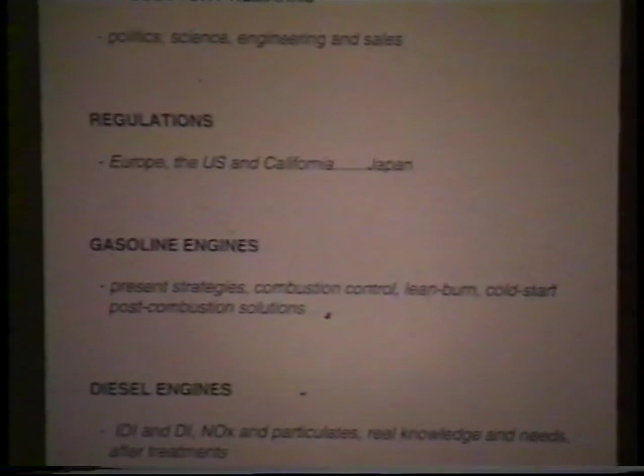So here's my title, Transportation and Exhaust Emissions. And I prepared a number of slides, and I've only used some of them. I think I have 24 slides in all. I want to make some introductory remarks about politics, about science, about engineering, and about sales. And there are 6 panels on this topic, so they're easy to understand. And then I will take 2 panels to say something about regulations.

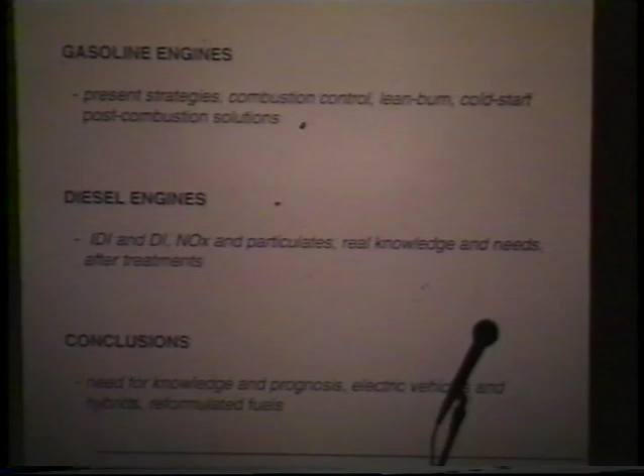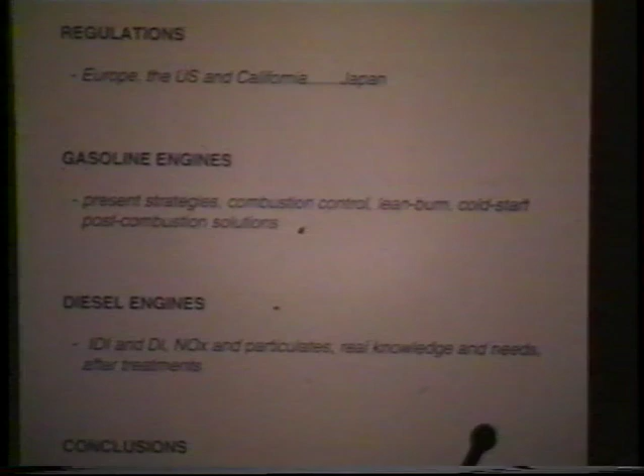And why do I choose regulations as the first topic after the introduction? I do so because the work which we conduct in universities, at least at the moment, is controlled by the requirements of people who make regulations for transportation. And I'm very grateful to them because they have set rules which are difficult to follow, and we have to spend money in order to try to understand and to improve the situation so as to meet their regulations. And I will mention only, I think, in this talk, some of the regulations in Europe and some in the United States, particularly in California.

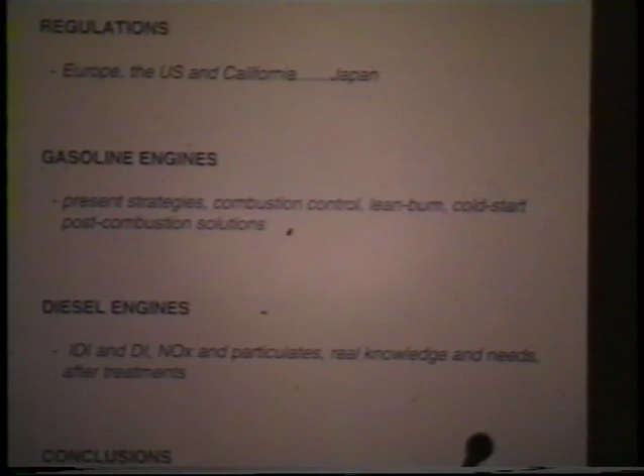And then I will go on to talk about gasoline engines and diesel engines, and you will note that I do not say anything about gas turbine engines for transportation, and the reason for this will become clear on the next slide. So when I come to the end, I will make some quick conclusions, but perhaps I can state the most important conclusion at the beginning, and it is that without better knowledge than we have today, we will not be able to meet the regulations which are proposed for the year 2000, so that more work is necessary, and it is more work of the type which involves understanding.

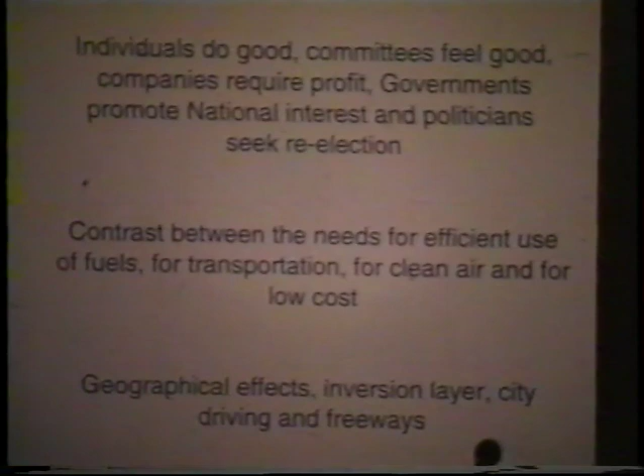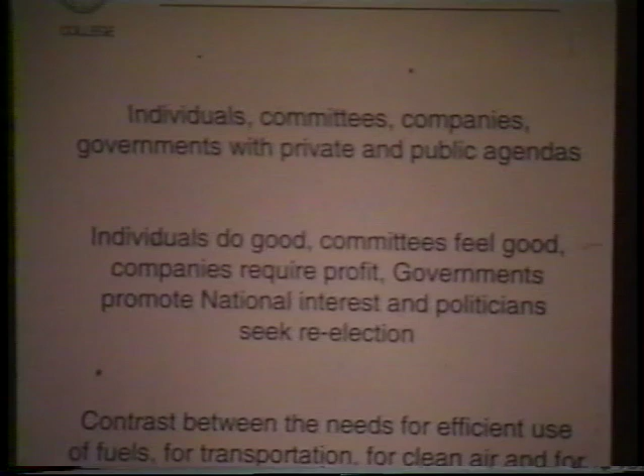The origins of regulations, the first of my introductory remarks. Regulations are formulated and imposed by individuals. These individuals come together in committees. The committees have representatives of companies, governments intervene, and private and public agendas are also there trying to make their statements. So that regulations are things which, to some degree, we can all influence, but it is difficult to influence them as an individual. The motivations of people who are on these committees are various. Most of them have goodwill, the good of the people at heart, but it's the people from the local region in many occasions.

Sometimes it's the people representing a state or a province, and sometimes it's people representing a national government, or in the case of Europe, the European Union. These people are in some ways responsible to politicians. The politicians, even though they are wonderful politicians, usually seek re-election. So each of these individuals, each of these committees, each of these companies, each of these governments and the politicians behind them have an axe to grind. And the grinding of the axes can often be heard for very, very long distances.

So we should be careful with regulations. They are not cast in concrete. They are likely to change.

If you consider the contrast between the needs for efficient use of fuel, for transportation, for clean air, and for low cost, and then think of the requirements of somebody who drives a truck and makes money from doing so, from somebody who sits on a beach and wishes it to be clean, for someone who sells gasoline or diesel fuel, or for someone who wishes to get from A to B in his Ferrari very quickly, these requirements are all different, and they are in some contrast. He who wishes to have clean air may drive his Ferrari, but he has to have a catalyzer in order to keep it relatively clean, and he probably would rather not have it.

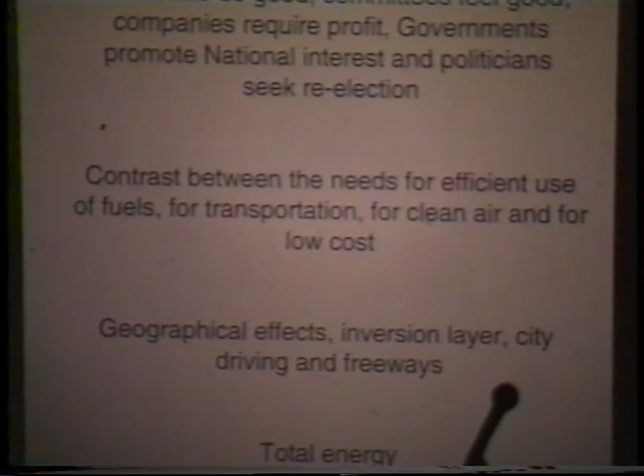It had to be designed, it had to be built. The manufacturing costs, at least in the first instance, are rather large. And so if you're going to talk about energy conservation, it should include manufacturing costs and the power levels, the generators which are required to provide the electricity which drives the electric vehicle. So it's a complex business.

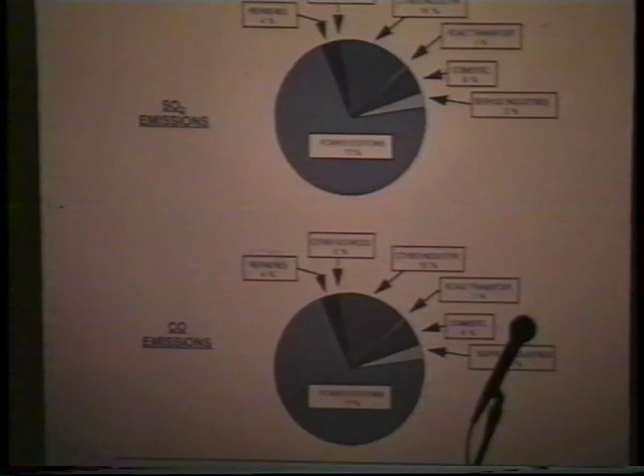And if you glance for a moment at each of these slides, you will see that road transport is responsible for a lot of the emissions of nitrogen oxides. It is also clear that power stations are responsible for just as much. There is nothing on this slide to represent airplane gas turbines, which is why I didn't want to talk very much about it in the context of the title of this talk.

The airplane gas turbines generate NOx. They also generate CO and CO2 and some unburned hydrocarbon, but as a total global quantity, it's small compared to what happens because of power stations and road transport.

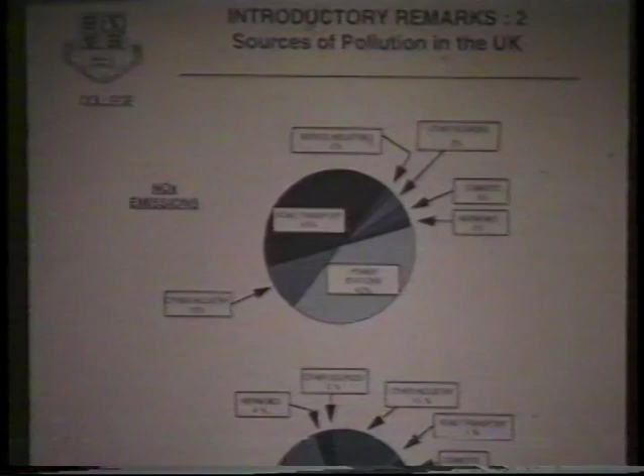If I look at sulfur dioxide emissions, about which I will say very little, there is an enormous problem, and it still exists in connection with power stations. There's a rapid trend to move away from sulfur-burning coal, sulfur-burning solid fuels, and an even more rapid trend to move away from solid fuels to gaseous fuels.

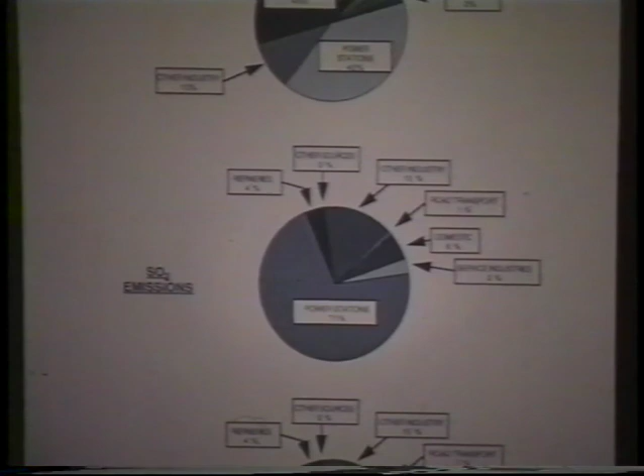But that will change again in the future, perhaps not in the next 10 years, but thereafter it will. And we'll be back worrying about how to clean out sulfur dioxide, which is a very nasty substance indeed, since with a little water it forms an acid, and the acid has harmful effects on just about everything.

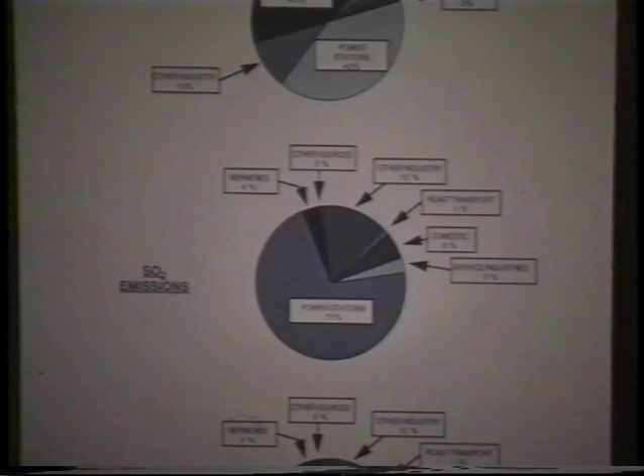Here I have carbon monoxide emissions, and carbon monoxide emissions are particularly important. They are toxic, they're plentiful. From power stations the quantity is very large, but from road transport the quantity is remarkably small. So in terms of road transport, we should worry about NOx emissions, and on this slide at least not very much about carbon monoxide. And if we're sufficiently efficient, then we won't have unburned hydrocarbons.

Perhaps I could say that these emissions in power stations may change in the United Kingdom when we start to burn cows. But perhaps it would be better if we burnt the politicians, but the pollutants then might be even worse.

A few words about politics, and I can take them in any order.

The top quotation comes from the Los Angeles Times, and it indicates the pressures which large companies can bring to bear on regulations imposed by other people.

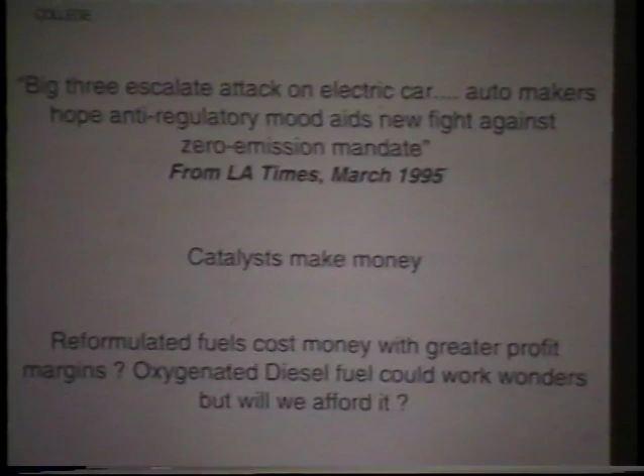The second one says that when you buy a car today, you buy a car with a catalyst, and you're happy to have the catalyst except when you stop the car because it smells, but you're not happy to pay for it. On the other hand, the manufacturer is quite happy. The man who provides the platinum from Johnson Matthey is extremely happy, and people like Daimler-Benz or BMW or Fiat are quite happy to make catalysts and make a profit from them, in the knowledge that you have to buy them in order to meet the pollution regulations.

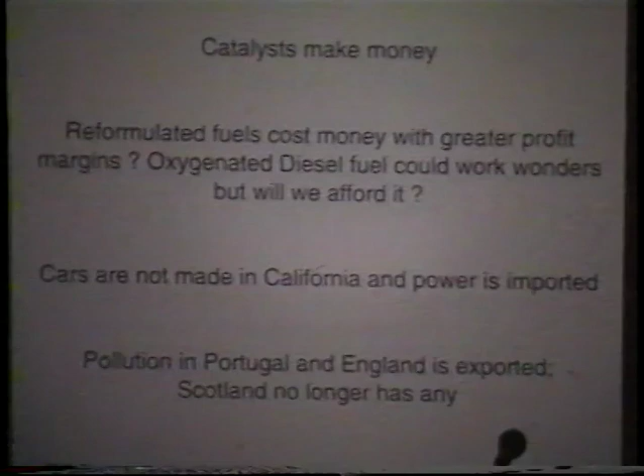Reformulated fuels, oxygenated diesel fuels, will we afford that? Well, reformulated gasoline improves the emissions, it reduces the amount of unburned hydrocarbon, it reduces the NOx, and now you buy it whether you like it or not, when you go to a gasoline pump in the United States, and you don't even notice the increase in cost, even though it was about 7 or 8 cents a gallon.

If it's more expensive to use oxygenated diesel fuels, but they too would improve things if we were prepared to pay for them. So there is a question here as to whether we will, in the future, spend more money by putting in better fuels into our cars or trucks.

Here's another line: cars are not made in California, nor is the power to make them. They don't make cars in California. The power supply for an electric vehicle doesn't come from California either. Much of it comes from Idaho and other places and is transported into the state. And yet the state of California has been responsible for much of the emission regulation which we're trying to meet today.

It's a very local problem, a local group of people effectively imposing regulations on the rest of us for reasons which suit them. If I think about pollution, there is almost no pollution in Portugal or in England because it's exported. It's something we export for free. There's a southwest wind and it transports it to other places. There is no longer any pollution in Scotland because there is no industry. The Industrial Revolution has disappeared and we don't have heavy industry there anymore, so we don't have much in the way of pollution. So some people care more about pollution than others.

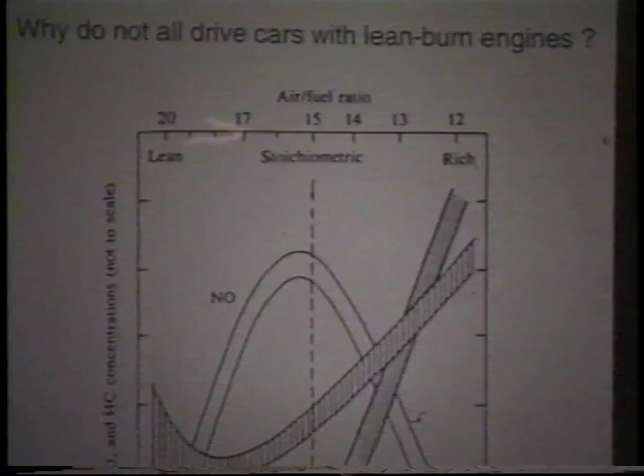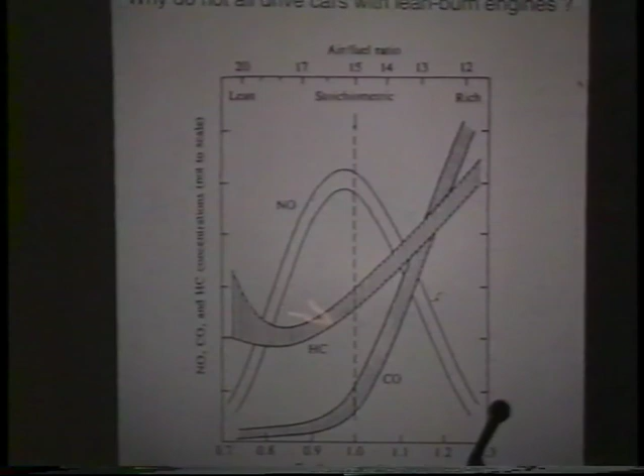This is a slide which relates to gasoline engines, and it's a technical slide, but it's easy to understand. If you burn your fuel and air in the engine with a mixture which has this ratio, 15:1 air to fuel, then you get a lot of NO, a lot of NOx, and you get a lesser quantity of unburnt hydrocarbon and some CO.

But if you were to burn in your car with an air-fuel ratio of 20, then the NOx level goes down, the unburnt hydrocarbon has gone down very slightly, and the CO level has gone down quite a bit.

So then you ask the question, why do we not drive cars with lean burn engines? There are two answers. One is that you can't drive with lean burn configuration all of the time because you want to drive quickly, so you need more fuel, and then quite often you're driving in this other range. That's one reason, although for more than half the time you could well be driving in this region here with low NOx.

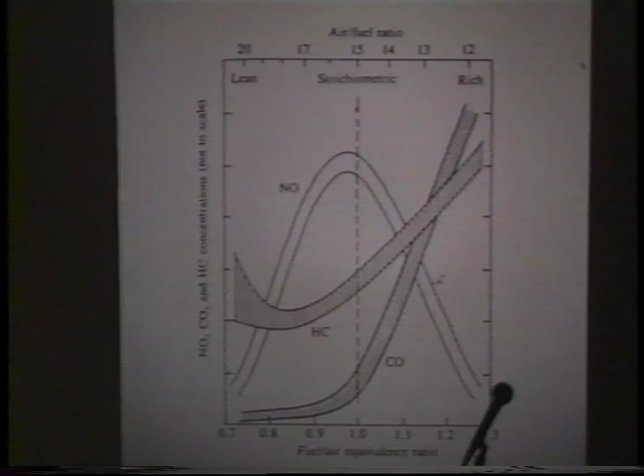So one reason why people do not drive with lean burn engines is that it's only for part of the cycle that you can use the lean burn. The bigger reason is that there has been an emphasis over many years in Europe and in the United States to drive everything with a catalyst. So you operate with this air-fuel ratio and the catalyst will work, burning out the extra unburnt hydrocarbon and converting the NOx into nitrogen and water. So the catalyst, in a sense, has begun to drive the industry as opposed to knowledge and best things for the individual.

How do we reduce emissions? There are two basic ways. One is to operate the engine with combustion controlled so that emissions will be at their smallest, which might suggest burning lean mixtures. In diesel engines, in the last 2 to 3 years, there has been almost a revolution with the advent of very high pressure sprays, computer controlled, squirting into each cylinder one at a time, and that's making a big difference to diesel engines today.

But it still involves a control of what happens inside the cylinder. The real question is, to what extent can we modify the combustion process to reduce emissions to meet the aspirations of the regulators? And that's why many of us are in the business of combustion today.

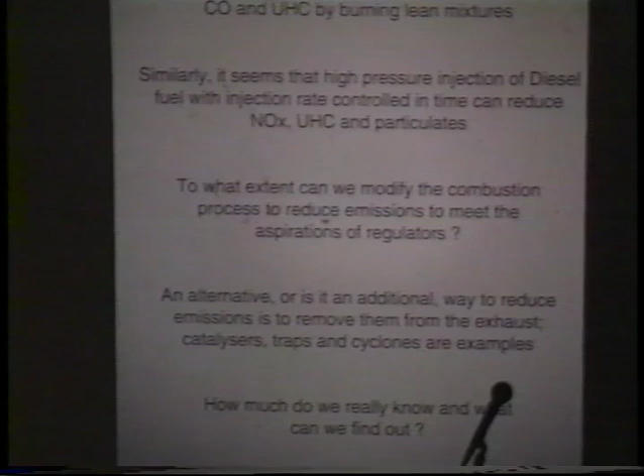The alternative is to allow the engine to behave any way it likes, or perhaps in a particular controlled way, and to have something at the back end. So in the gasoline car, you have the catalyst. In the diesel car, you also have a sort of catalyst, but you may have to have a bucket to pick up the particulates so they are not deposited into the street or into your lungs. Catalysts are something you do after the event, and capturing particulates is also after the event. There is no doubt in my mind that we would do better to concentrate on the combustion process itself, even though the catalyst and the separation of particles may be necessary in the immediate future.

The question at the end is one I'm going to try to answer: how much do we really know, and what can we do to find out?

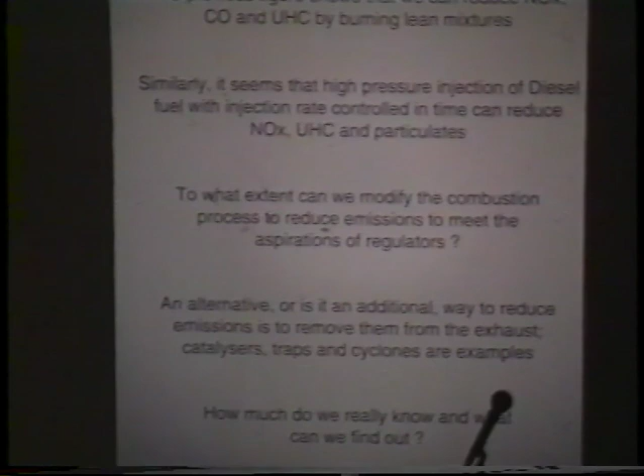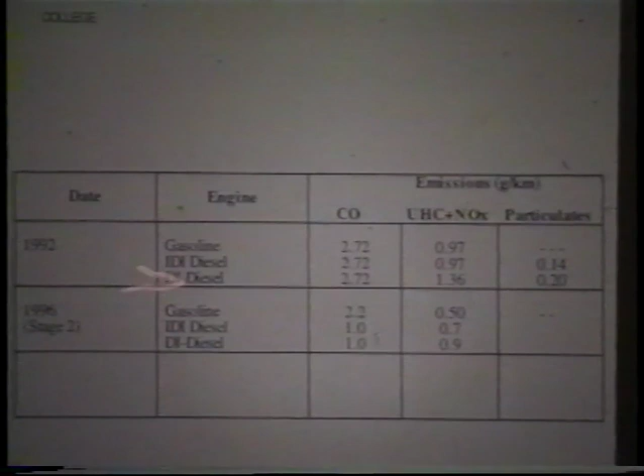A few words, and only a few words, about regulations. If you go back to 1992, the European Union imposed regulations on carbon monoxide, on the combination of unburnt hydrocarbon and nitric oxide, and for diesel engines, on particulates. The EEC also said they would give the direct injection diesel engine a break because more development work was necessary, but also because there's a high probability that the DI diesel engine will prove to be better than the IDI system, and that's why we all work on it today.

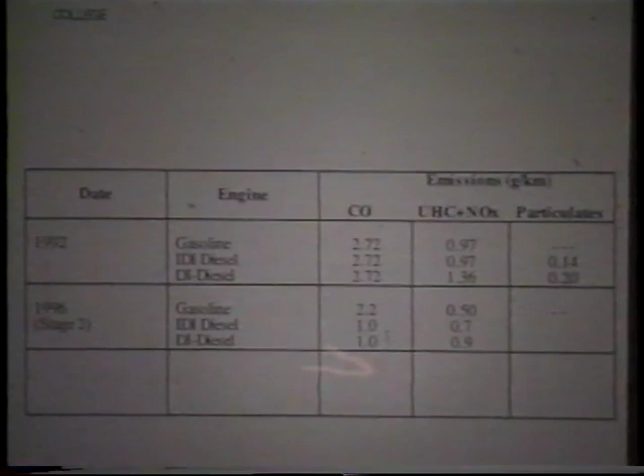So the regulations are posed in this way, and you can see that the quantity of carbon monoxide allowed in 1992 was reduced in 1996, and if I put in the stage 3 regulations for year 2000, these quantities would come down even further.

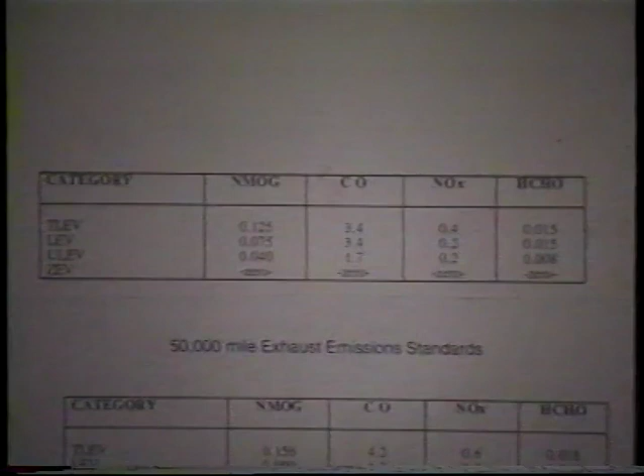The emissions regulations are still formulated in the same way, but this may well change. If I look at the way Californian standards are imposed, they're different. They don't combine unburnt hydrocarbon with nitrous oxide. They separate the different aspects of the hydrocarbons in these two tables, with CO separately and NOx separately.

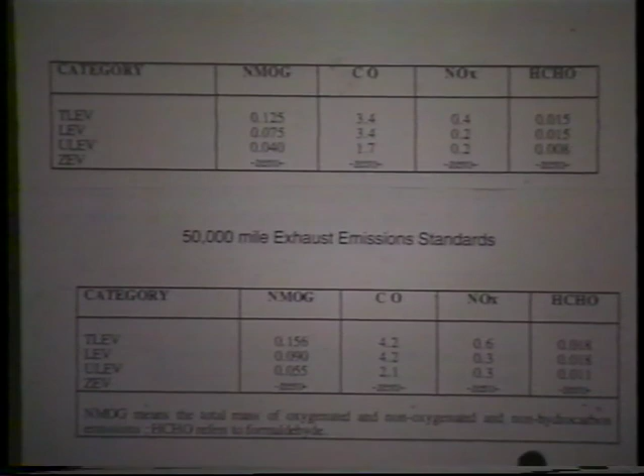But they have one bigger difference: they categorize vehicles according to a particular code, indicated in these little letters. They say we have today transitional low-emission vehicles, we have today low-emission vehicles, tomorrow we will have ultra-low emission vehicles, and ultimately zero-emission vehicles. The regulations about to be imposed will say that in 2003, 10% of all vehicles on the road have to have zero emissions. Today they say in 2 years' time, in 1998, 2% of vehicles on the road have to have zero emissions.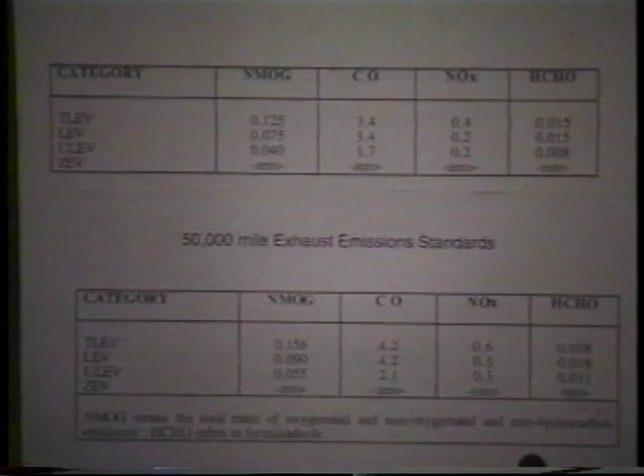In a way this is a strange decision, because there's no such thing as a zero-emission vehicle. There's always an emission. It may have come from the power plant which provided the electricity to drive the car, but the emission is still there. So we should be careful with these regulations. And that's all I'm going to say about the regulations.

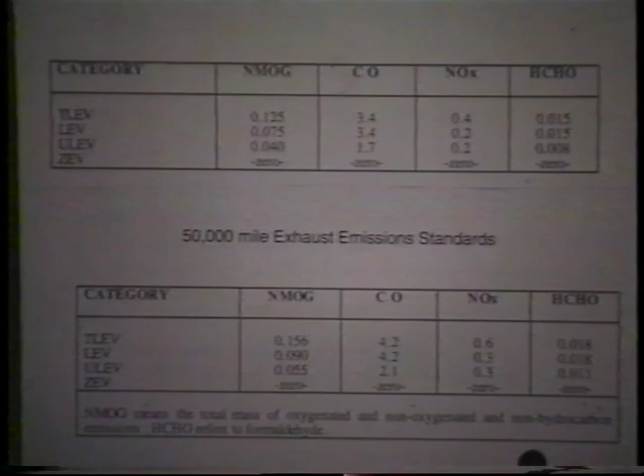I want to switch and say something about gasoline engines, and then something about diesel engines. And here's something about gasoline engines: I start and end with the catalyst. But I believe the catalyst is like a tail wagging a dog. That's how it appears to me in the way we work with engines just now.

The present three-way catalysts will only operate if the air-fuel ratio in the engine is within a certain range. You have to have some excess unburned hydrocarbon coming into the catalyst to light it. If you do that, you'll get 80% conversion of NOx, HC, and CO into effectively water, nitrogen, and CO2.

That number, 80% efficiency over that range, means you're talking about a new catalyst, one that hasn't been used and is about to work. It will work like that for a period of time which is not well quantified. We don't know very much about the longevity of catalysts; we just know that they get worse. That's one reason why countries have some control to try and regulate the car. They're tested after 1 year, 2 years, 3 years, depending on where you are. But the tests are not very sophisticated, so in all probability catalysts decay more rapidly than we think, and together with the catalyst, the emission performance decays too.

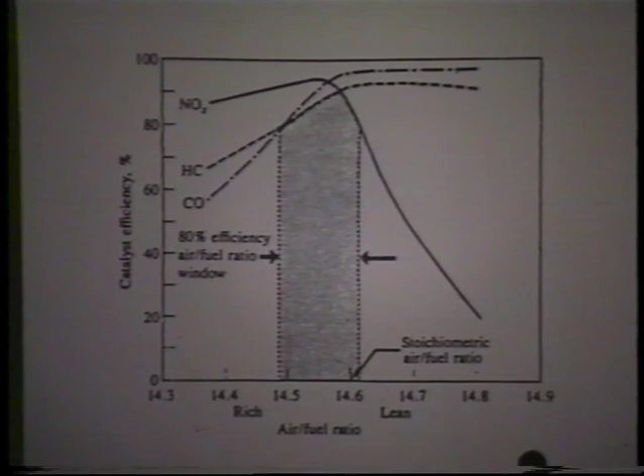If you look at the split between Japan and Europe/United States: in Japan, they make engines which operate with lean burn. In Europe and the United States, we make engines which operate with stoichiometric air-fuel ratios and with some exhaust gas recirculation. Exhaust gas recirculation will never be as effective as lean burn, but it's a convenient way to operate to guarantee you get the emission regulations satisfied, provided you have the stoichiometric ratio and a catalyst which is working properly.

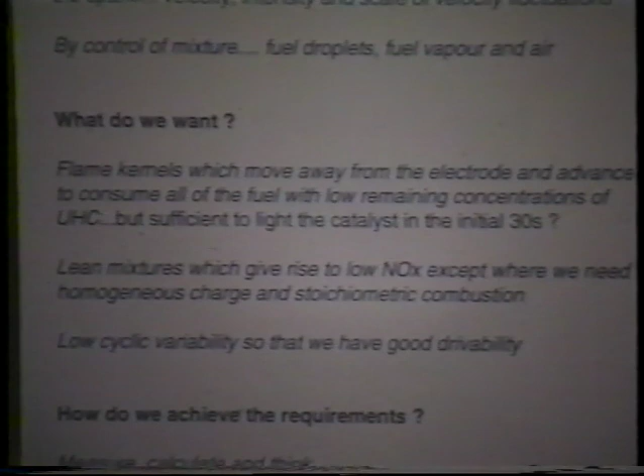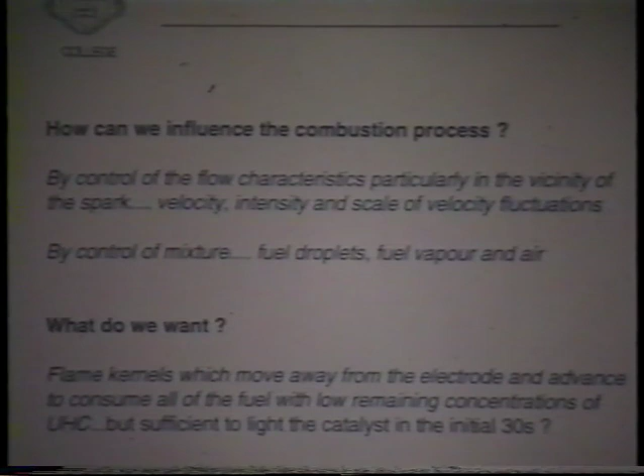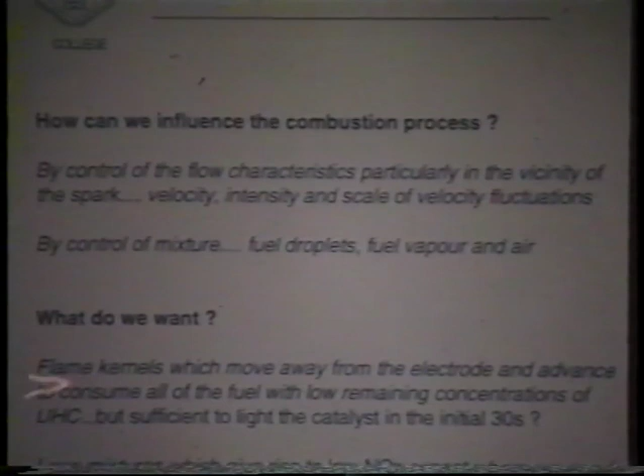How can we control the combustion, which is what we'd like to do? We have two main ways of doing it. One is to control the flow characteristics in the combustion chamber, and the other is to control the fuel, the way the fuel is added to the combustion chamber. That's true for both gasoline engines and diesel engines. What do we want? We want an engine which, when you climb into it, you put your foot on the accelerator and it takes off.

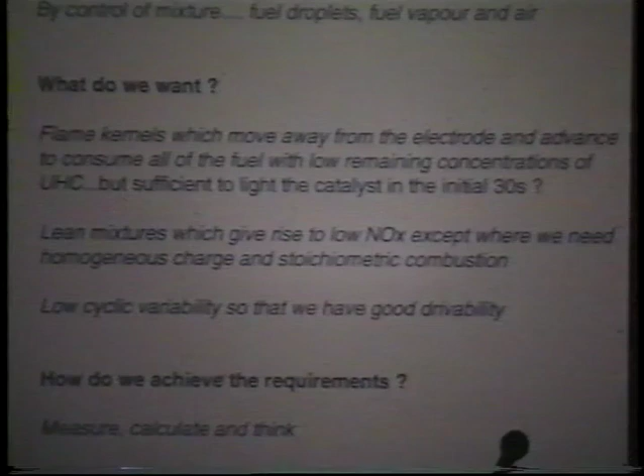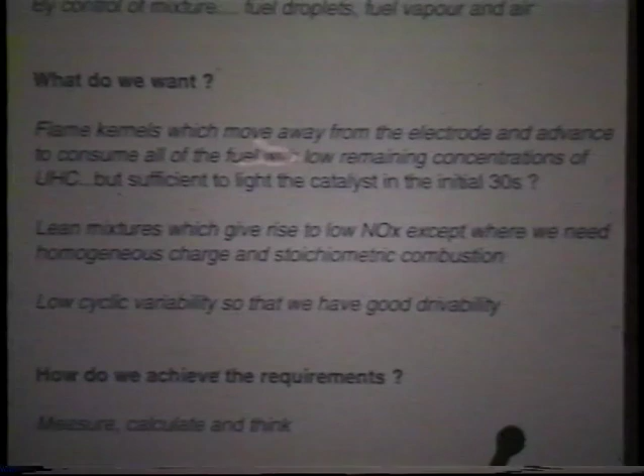It doesn't make vibrations. It runs reasonably economically, and it will accelerate past the person that you don't like in the car in front of you. I can translate this into flame kernels. This is a little flame which is formed when the spark takes place, which will move away from the electrode, that's the spark plug, and advance to consume all of the fuel with low remaining concentrations of unburnt hydrocarbon, and yet leave enough unburnt hydrocarbon to light the catalyst, which is down the pipe and underneath your feet.

Lean mixtures, which give rise to very low NOx, or can give rise to very low NOx, may have some problems in other respects because they may produce higher concentrations of unburnt hydrocarbon, but that too can be overcome. We want to make sure that we have low cyclic variability, and that translates into drivability. When you put your foot on the accelerator, the car should accelerate smoothly. And at the bottom line, I haven't put it here, we should always want to have a car which is efficient with good fuel consumption.

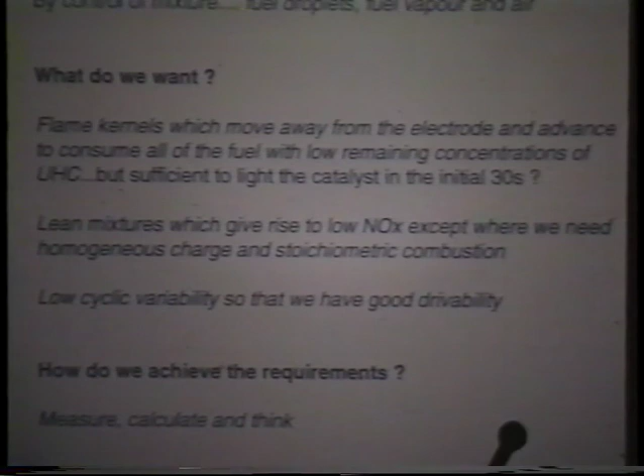And how do we get these things? Well, we measure, we calculate, and we think. And if I can then plug in 3 or 4 slides what it is that we do when we measure, we build special purpose engines like this thing here, where you can get optical access and you can see what happens inside the combustion chamber. And then you develop techniques like the ones written here, laser Doppler velocimetry, phase Doppler velocimetry, fluorescence, and so on.

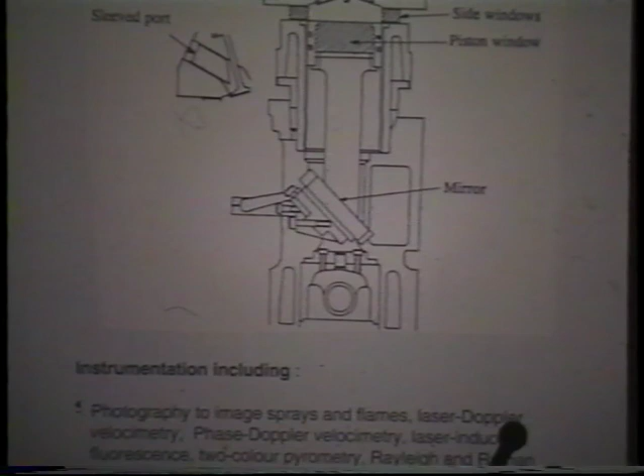Very complicated techniques which many of my colleagues in the audience today have participated in and indeed been leaders in the development of, so that today we can make measurements inside these engines where yesterday we could not. These instrumentation developments are essential to what we do today. If they had not been made in the past few years, we would not do very well at developing what happens inside the combustion chamber of an engine. I can say the same thing for calculation methods, that you have to have a lot of background work in order to develop a calculation method which will allow you to usefully predict what you might get inside an engine.

This is a messy slide, but there are only a couple of things that I want to say, and they're easy for me to say. This is a slide which says that if you change the velocity characteristics within an engine, then you can change some things which matter. And let me just pick 2. Well, 3 maybe. These are flame kernel growths inside an engine when you change from a flow which is almost not there, pretty well quiescent, to a flow which is there. And this lot of flame kernels are a little bit bigger than those which you see here.

But this slide here shows that for any given equivalence ratio on this axis here, the mean effective pressure is very much increased. That's this curve here, when I have flow inside the combustion chamber. So in this slide, I've arranged a flow inside the engine, and I get a much better mean effective pressure. You're looking at numbers, I can barely read them, but about 30% better in this particular case at an equivalence ratio of something like 0.9.

At the same time, this slide shows drivability, the coefficient of variation of the pressure fluctuations, and the corresponding curve to that one there is the bottom one there, which says that the car is much easier to drive. So by producing a flow inside the engine, you make it more powerful and you make it more drivable for the same amount of fuel. How do you arrange that? Well, you do it by changing the port and the valve and the shape of the combustion chamber. And about this, we know a lot.

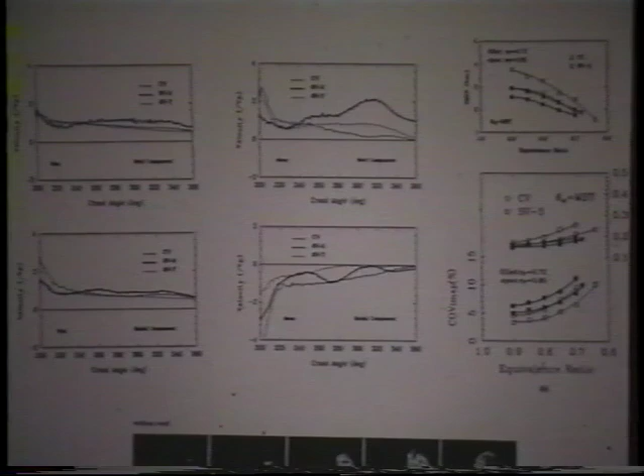The second thing which you can do is on this slide, and I will take it in 2 stages. This is a slide which shows the variation of peak combustion pressure in an engine as a function of the equivalence ratio or the inverse of the air-fuel ratio. So if I'm stoichiometric, that's where most cars run, I'm up here. If I'm lean burn, I'm down here.

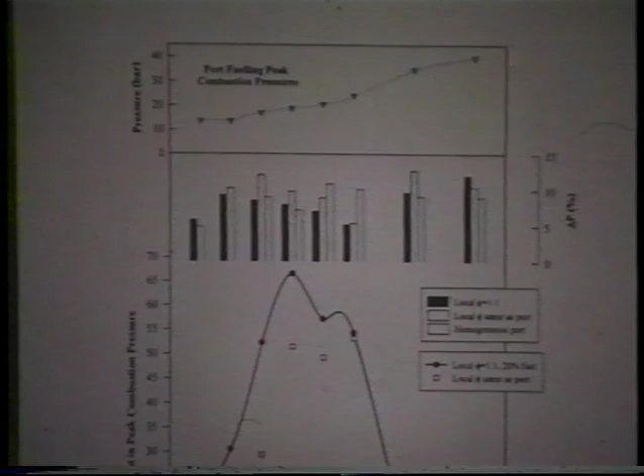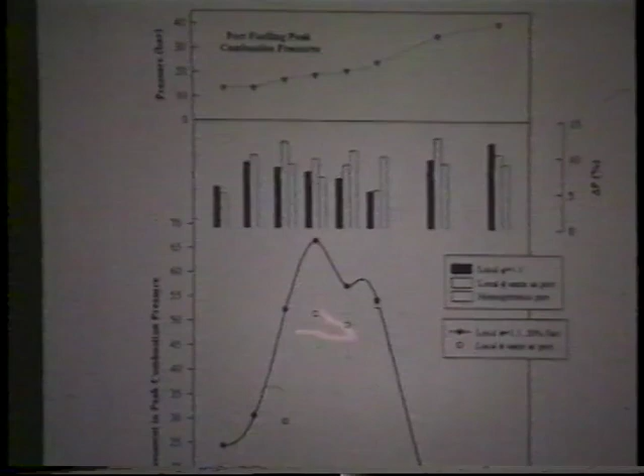And if I introduce into this flow a small jet, a turbulent jet, which is aimed at the spark plug, a very small one with a very little amount of air, then I can get a benefit. I can change the peak combustion pressure, for instance, here at the equivalence ratio of 0.7. I can improve it by 55%, just by that small jet aimed at the spark plug at the right time.

Now I put that slide in partly because I wanted to say a few words about something called direct injection, because you have different ways in which you can put the fuel into this engine. What I've drawn here is one where about 80% of the fuel goes in with air through the port, and the rest goes in through this little jet. But you can turn that around, and you can put all of the fuel and all of the air in as a jet, and you get a direct injection gasoline engine.

There is nothing new about gasoline engines which have direct injection. Mercedes had them in 1952, I think, although I was too young to notice. More recently, they have them in one engine coming from Japan, the Mitsubishi engine, where they have direct fuel injection in that car, and they tell us that the performance is wonderful, but we don't know yet.

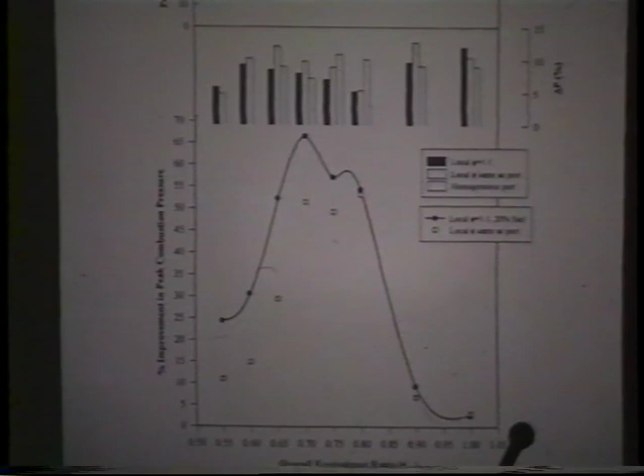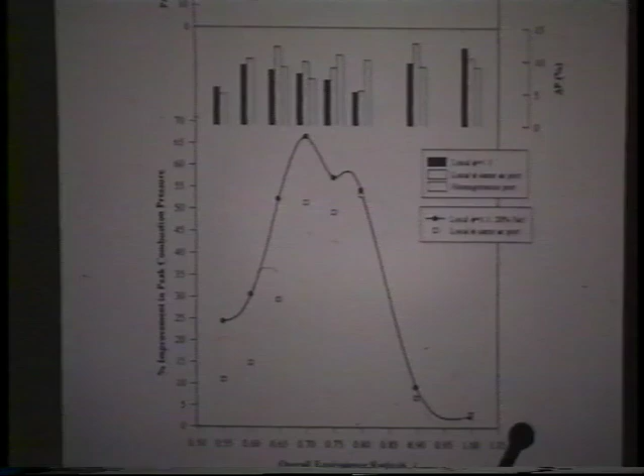So there is a range of ways of injecting fuel and air into the engine, and I've tried to dwell on three. One where you have the fuel coming only through the port. One where you have some of the fuel coming through a small jet, and a third one, which I have not shown, where the fuel comes entirely through a small jet and aimed usually at the piston in order to atomize further before it is burned. It is not clear which of these is going to be best. That's something that remains to be proven. But they do give you a degree of flexibility in improving the emission performance of vehicles of today.

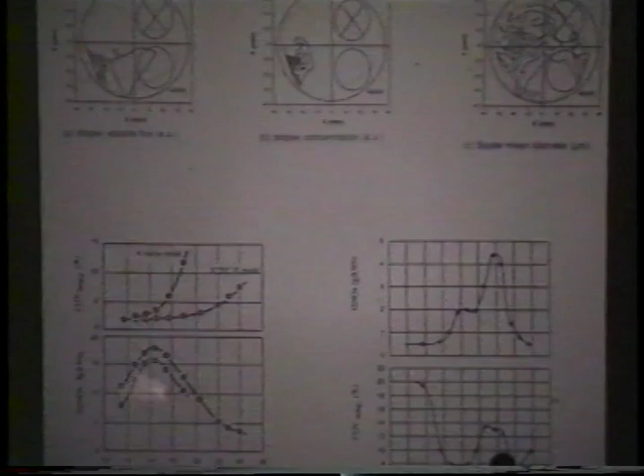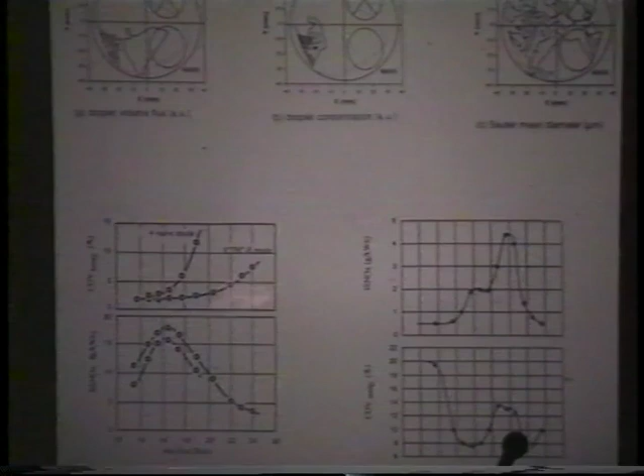And because that changes the flow pattern inside the engine, which is port fueled, the drivability in the engine is much better. If you climb into a car with a COV bigger than about 7%, you will complain. If it's less than 7%, you'll be very happy. This engine will run to only an air-fuel ratio of something like 18 before the drivability is very bad. But this engine here, which is the same engine with a different valve movement, will go to an air-fuel ratio of 24. Now, every car that I know in Europe today and in America operates like this and not like this. There must be a lesson there for us. And if I look at this diagram here, the NOx concentrations out here, with the lean burn situation, have gone down to a small fraction of what they were there. So perhaps we have something to learn from our Japanese friends.

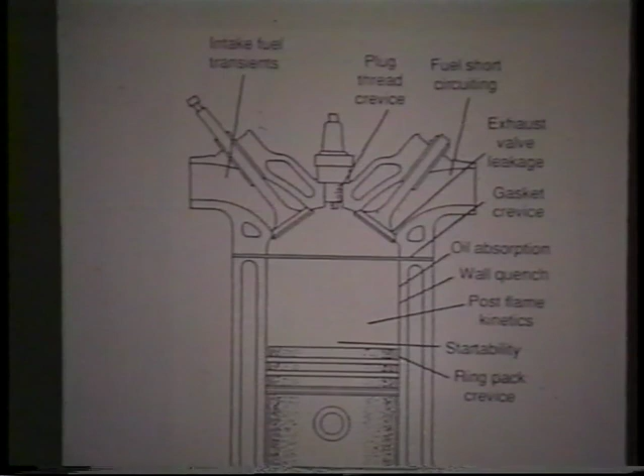Let me stop the talk about gasoline engines with 2 quick slides. One of them is to say that we know a lot about gasoline engines. We want to get rid of the unburnt hydrocarbons, except for the small amount which we need in the catalyst, and we know where they come from, and we know how to get rid of them. It isn't easy, but we know how to do it. And then the last one comes back to my catalyst again.

One approach to the problem of catalysts is to say, I will develop a catalyst which will operate with lean mixtures, so that then I can sell my catalyst as well as have my lean burn engine. The levels of NOx which you get from a truly lean burn engine are only slightly higher than those from present day regulations. But that small difference has imposed a very big effort on the industry in order to make new catalysts which will operate with these lean mixtures, in order again to convert the carbon monoxide, the hydrocarbon, and the NOx into CO2, H2O, and nitrogen. And this may be a disproportionate effort, but it's an effort which is going on and which will, in the end, improve emission situations.

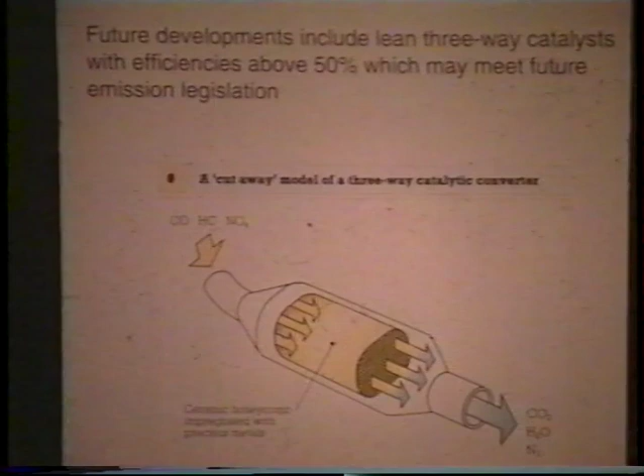Now I have a few slides on diesel engines which say some of the same things. Diesel engines are awful. Diesel engines are smelly, heavy, not responsive, things which we see very often. And I say that because you don't want to drive them most of the time, some of you do, but when you want to drive them, you want them to have performance the same as that of gasoline engines, and

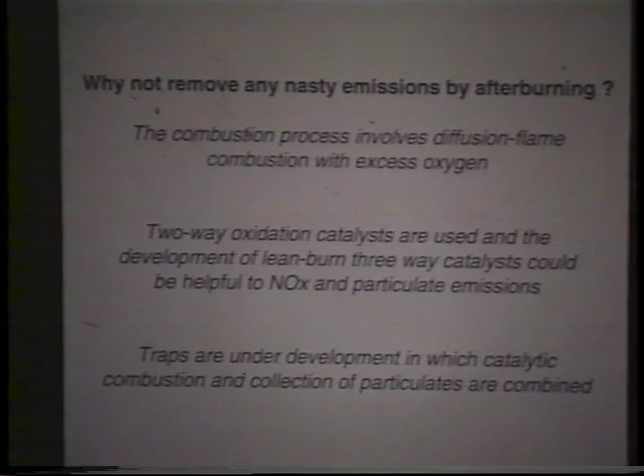it's hard to do. I also say it because it seems today that every time I drive behind a truck, something must be wrong, because when he changes gear, usually automatically, I get a slug of soot, or particles, coming into my intake system in the car, and I can smell it from some distance down the road.

Why not remove the nasty emissions by afterburning? Well, it's much more difficult to do in the diesel engine because the combustion process is largely a diffusion combustion process with excess oxygen, so you can't use the same type of catalyst. Secondly, the generation of particulates inside the diesel engine is different. And although the particulates may be small, they're of a particular chemical composition and stratification which makes them difficult to

burn out. They can be burned out, but they're difficult to get rid of, which is why today and for some years to come, I'm sure that we will have traps at the back end of diesel engines trying to get rid of the particulates before they fall into the atmosphere. Two-way oxidation catalysts are used today, although very recently, and three-way catalysts for low NOx, the same as for the gasoline engines, are under development just now.

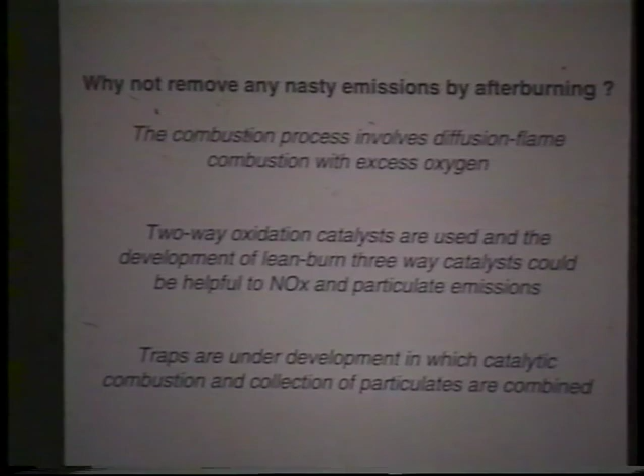Traps are under development together with catalytic combustion and an afterburner. I love that phrase. An afterburner, and the collection of particulates is also something which is proposed. But just as with the gasoline engine, that is not the solution. The solution is really to try to understand and to improve what happens inside the combustion chamber.

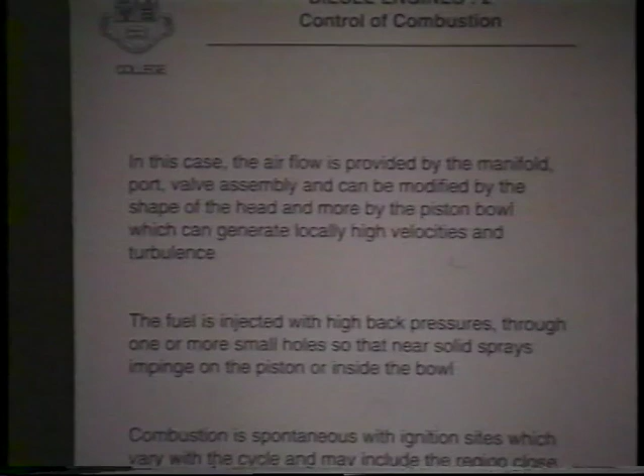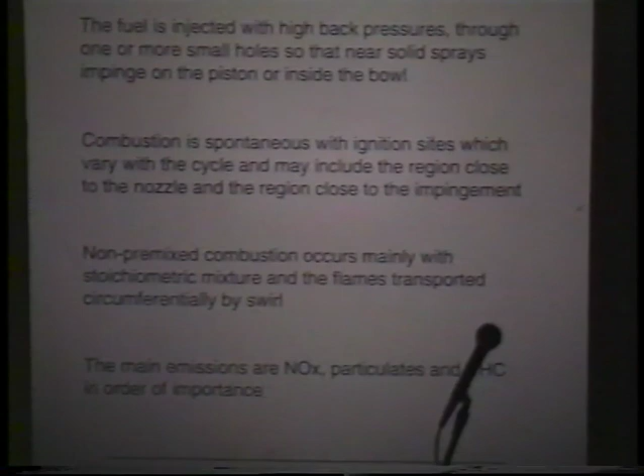We have the same situation that we have in the gasoline engine, but a little bit more slowly. We have 2-valve and 4-valve heads. We can manipulate what happens to the valves. We can manipulate the shape of the intake port. We can take the direct injection spray and we can phase it in different ways and locate it in different positions. There is a great deal of work which can be done, and big steps have already been taken, because today we are able to inject with very high pressures and therefore to atomize the fuel into very small droplets and therefore evaporate it much more quickly.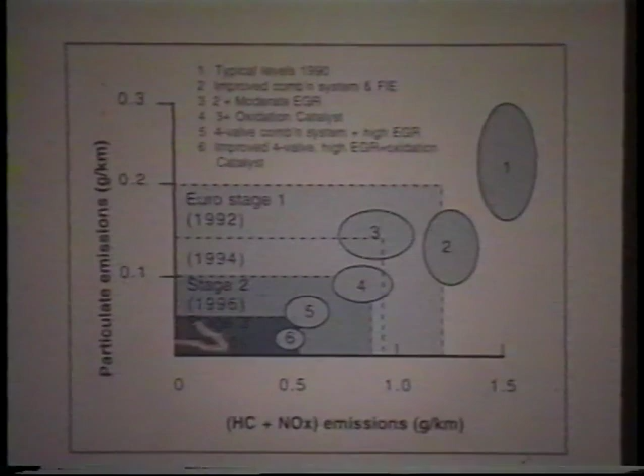And you can see the degree of success which has been achieved in this slide. This is a little chart which says, here you've got particulate emissions, here you've got hydrocarbon and NOx emissions on these two axes, and the trend is coming down here. You look at the regulations, stage 1, 1992, 1994, stage 2, 1996, and the proposed stage 3 for 2000, you can see the trend. Now, we haven't achieved this. Indeed, we haven't really achieved this, but we're getting very close.

Previously, we had these levels in this region here, 1990, that's past history. Around about this period here, in 1994 really, we started to use high pressure injection systems which are computer controlled with fuel squirting separately and controlled at each cylinder, and that got things better very quickly. And then we started to understand what we were doing by using a certain amount of exhaust gas recirculation, and that cut down the unburned hydrocarbon and decreased the NOx as well, so they both went down in this axis.

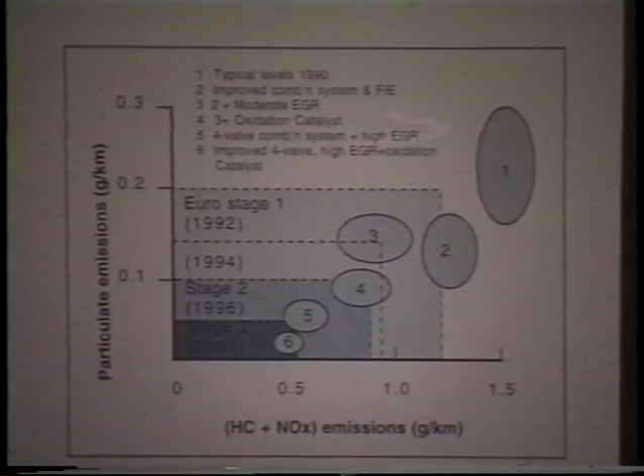And then we got rid of some of the particulates by putting in an oxidation catalyst at the back end of the diesel engine. But you will find today that not all diesel engines have this. And then going ahead a little bit, the 4-valve engines, which are now common in gasoline engines, are coming in diesel engines to give us the possibility of more control of the combustion, and with higher levels of exhaust gas recirculation, we expect to get down here. And then if you stick an oxidation catalyst in the back end of that, we hope to get down to this thing here.

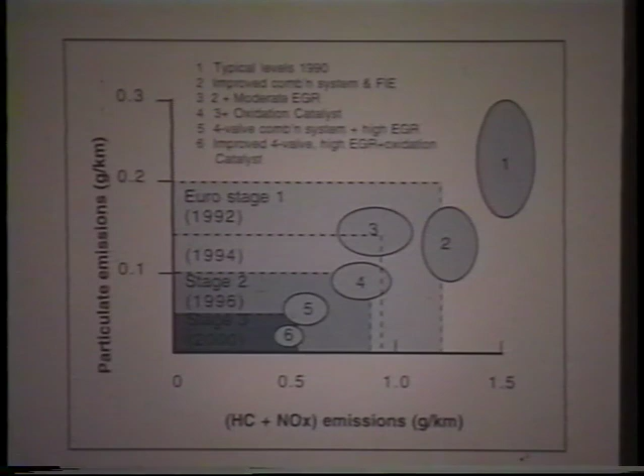Much of that is hope. Much of it depends, perhaps all of it depends, on work which will be done by people like Professor Payri and his group here in Valencia, who are leaders in this subject in Spain and throughout the world. It's a very important topic, and if you drive behind the same truck as I did, then you will have the same desire to make it clean up.

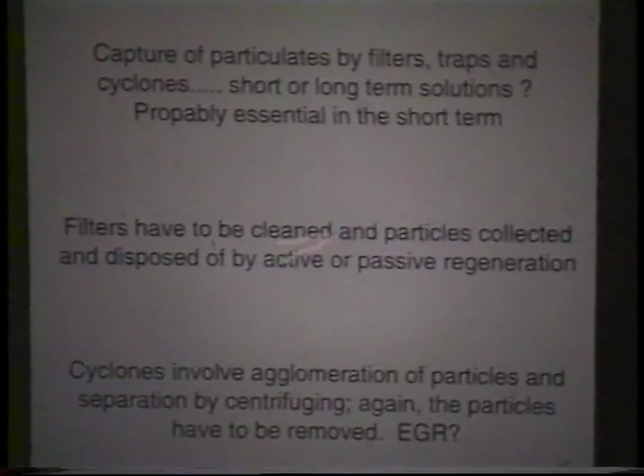After-treatment is probably essential in the diesel engine in the short term, as it is in the gasoline engine, probably more so in the diesel engine. If you do use filters, they have to be cleaned. It's a nuisance. If you collect the particles, you have to dispose of them. So there's a lot of talk about active and passive regeneration, which really means that you're going to have a little burner sitting under your feet in the diesel engine in order to burn out the particulates.

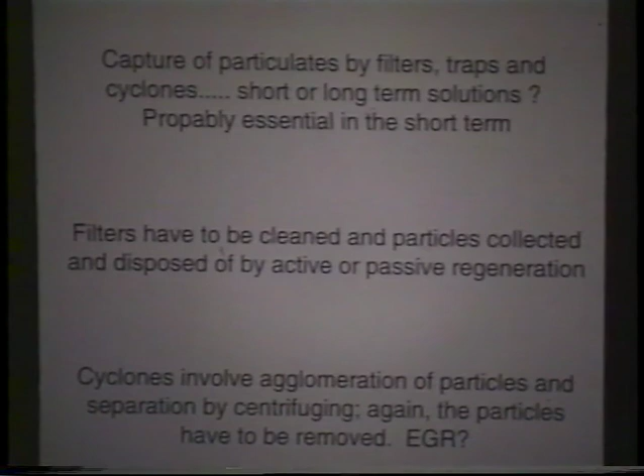Cyclones can improve the agglomeration of particles and therefore make them easier to separate by further centrifuging. Again, the particulates have to be removed, and there is still some uncertainty as to the extent to which we can gain further benefits from exhaust gas recirculation.

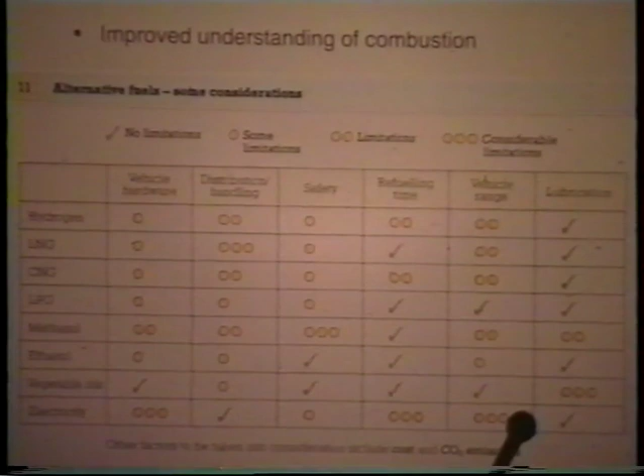And in my last slide, in the knowledge that 1 or 2 of my students are not going to survive unless they have a cigarette in the very near future: zero emissions, there is no such thing. So when California introduces regulations saying that we must have zero emission vehicles, they're kidding themselves. It may be low emissions in the immediate vicinity of the electric car, which they're talking about, but you had to plug it in, and a power station had to provide the energy, and somebody had to spend the money and the effort to make that vehicle in the first place. So we need total energy considerations and not just local ones.

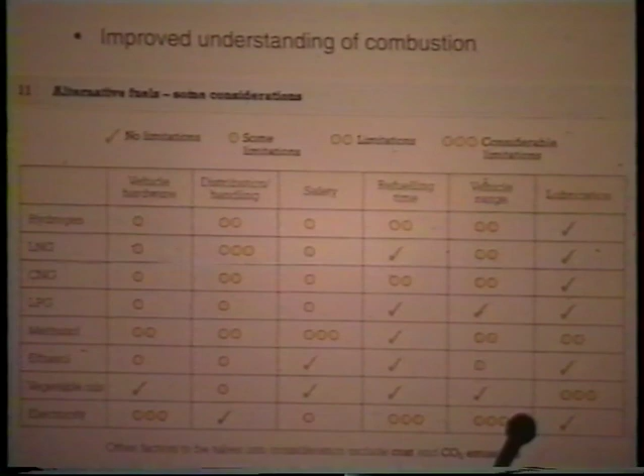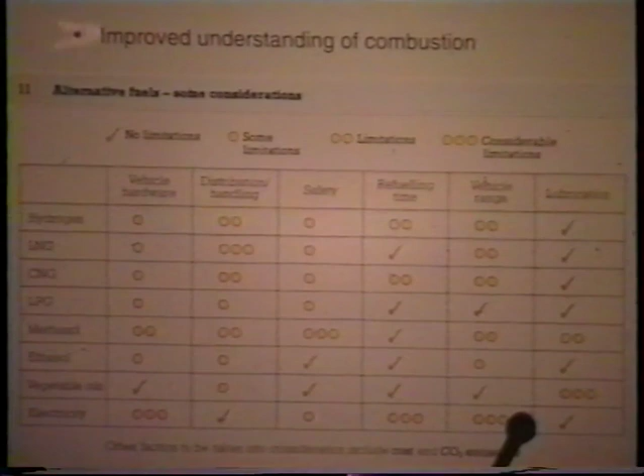Electric vehicles and hybrids, well, I'm sure they will come, but I think they will be very slow, in both senses of the word. Modified fuels for gasoline and diesel engines, I'm sure that we will find them imposed upon us in the not too distant future. It's not a question of choice. Governments will impose better gasoline, reformulated gasolines, and oxygenated diesel fuel. Treatment of exhaust will continue. It's something which will go on for a long time until we know enough in order to overcome the problem from inside the cylinder, which is where most of us would prefer to work now, tomorrow, and probably the next day.

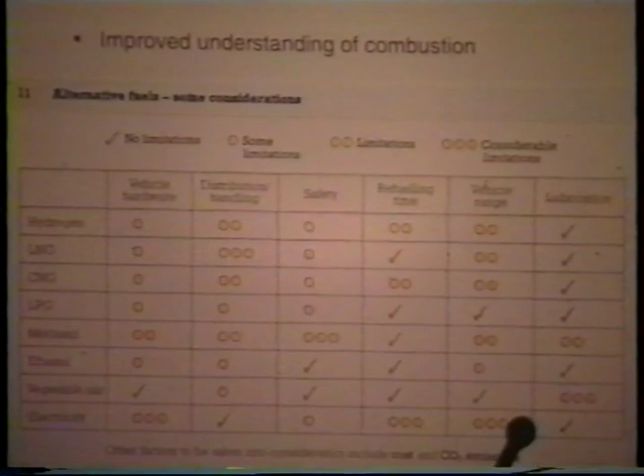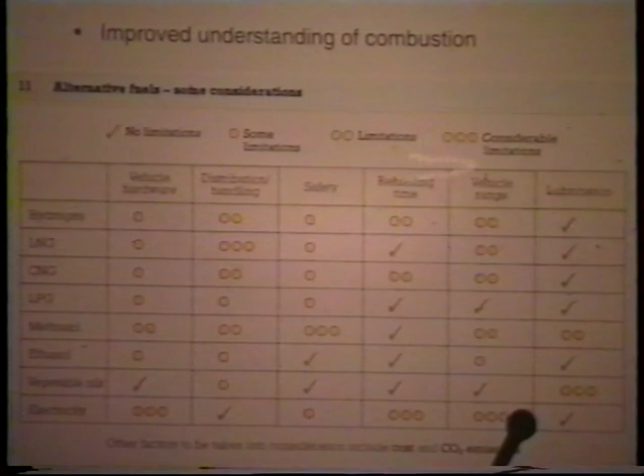And if you ask further questions about alternative fuels, don't ask the question about hydrogen engines. They might be low in pollution, but they're high in danger, and I don't believe they will happen. Don't ask the question about vegetable oils, because although they're fine in some respects, there are lots of problems in others. And if 3 blobs is a sign of what we don't like, and this is not my slide, you can see 3 sets of 3 blobs for electricity as something which is not likely to happen quickly. On the other hand, if you look at liquid gas done properly, it offers high possibilities for the future.